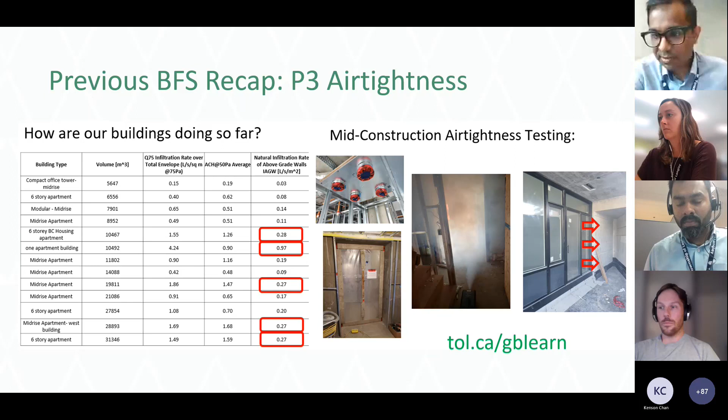As a reminder, at the bottom right of the screen, tol.ca/gblearn, that's Green Buildings Learn, is where you can find all of our previous lectures, including the one on airtightness.

Other notes, there's some challenges to the air barrier system. There's no single air barrier trade. Trades need good drawings on details to follow and good site instruction. Portions of the air barrier are installed by different trades. Tradespeople can unwittingly, unknowingly damage the air barrier. It's easy to miss problems during visual checks. However, there's still airtightness targets you want to meet.

And this all sums up into a repeated topic: the integrated design process. You want to apply it to air barrier systems, as Einar notes. It takes a high-performance design process to deliver an affordable, comfortable, healthy, sustainable, efficient, high-performance building. So the idea is get everybody in the room as early as possible and share knowledge to improve outcomes.

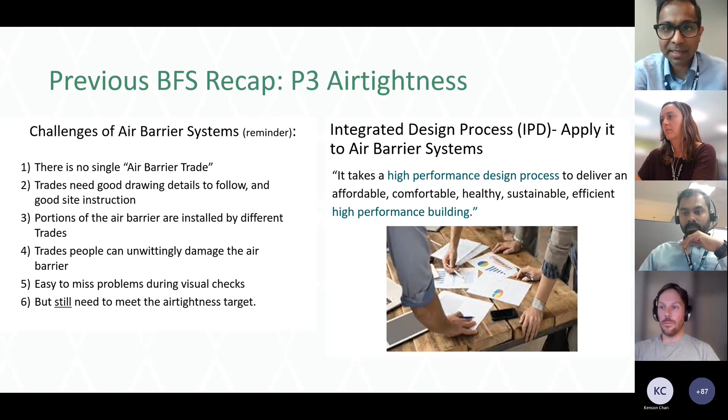Okay, so that was a quick summary of what some of the things we learned in the last workshop. I'd like to move on to our step code adoption updates. So a couple things here.

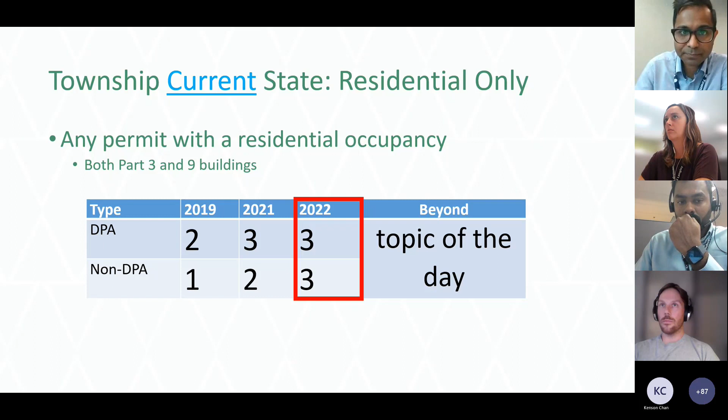So some stats on our residential application of step code. We track a lot of data. We really want to know how step code is being successful in the community. What we found was, out of all of our building permits that have reached final, so we've had roughly 497 or almost 500 building permits that reached final.

160 of those permits, or otherwise 32% of those building permits, exceeded step code requirements or met a higher step. So it's not just a little bit of buffer, this is into the next step of whatever they were required to do. So that lets us know that industry, that's great if people who are trying or experimenting with new ideas are benefiting.

Most of the comments that we track for Part 3 buildings were usually around documentation and design methodology. So documentation, just to be clear, is really if we ask you for a certain number of documents, which is all on our website, and you're missing one, it's flagged. We cannot process it if you're missing your compliance form or your energy modeling report or what have you. If it's missing, we simply stop the process and let you know.

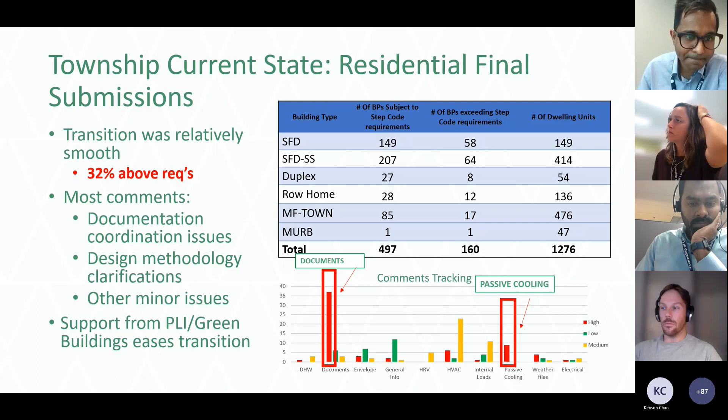So that's where we find document issues. However, it's relatively light, we'll let you know. But however, that does slow down the process if your documentation is incorrect. And the rest of it's around design methodology clarifications, and that's fine. We're here to answer questions, please do, and other minor issues.

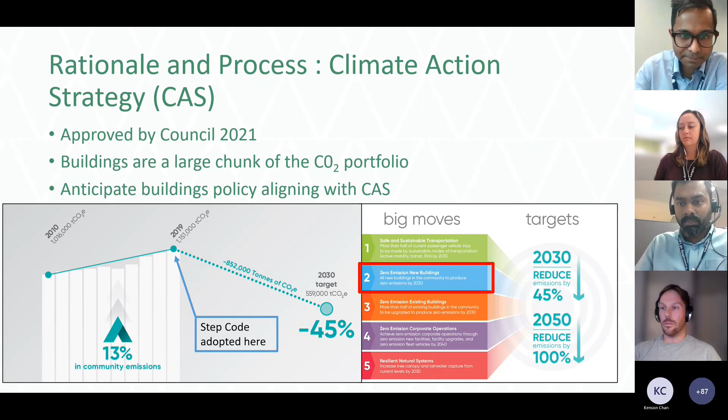We conducted a very rigorous and detailed study on implementation of Part 3 Energy Step Code for the Township of Langley. We did publish this report, and you're welcome to see it on our website. It really focused on staffing resources and let us know that for successful implementation, you want to have the capacity in-house, which we do, as part of the Green Buildings team's role.

We did a technical analysis as well of how Part 3 Energy Step Code adoption meets our goals. Long story short, Step Code does provide significant GHG reductions, energy reductions, and supports the climate action strategy. Our simulations show about 69% reduction in GHGs by 2050. However, that is not the end goal, so we anticipate other policies to help us reduce our GHGs to meet those end goals.

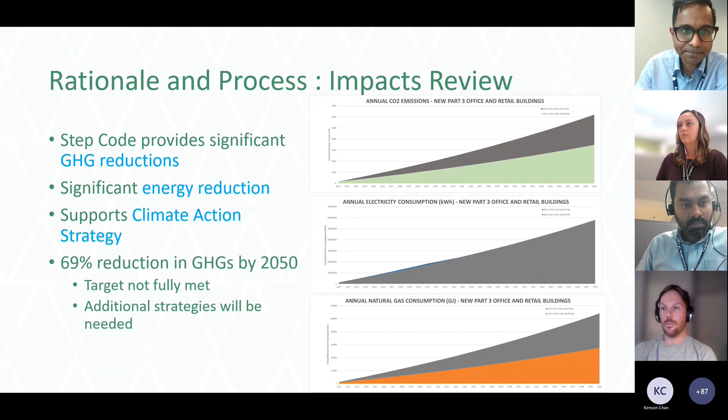Our consultation on Part 3 noted nothing's really unexpected. Step 2 is not an unexpected starting point. There needed to be an acknowledgement of how energy intersects with the aesthetics of a building, and that's acknowledged. Lead time was important, and a notice of when Step 3 would be required was important. There was a call for continued education for the development community, and that's why we're here, along with acknowledgement that these industries can benefit from direct resources from green buildings through answering questions and support.

Okay, so to Part 9, for residential non-apartment BCBC updates. The BCBC in the province has been working on the updated 2022 BCBC. A part of the updates of the 2022 BCBC is a proposed Step 3 baseline minimum.

So that's really important to acknowledge here. Step 1 and 2 are removed, or being proposed to be removed, from the upcoming code update.

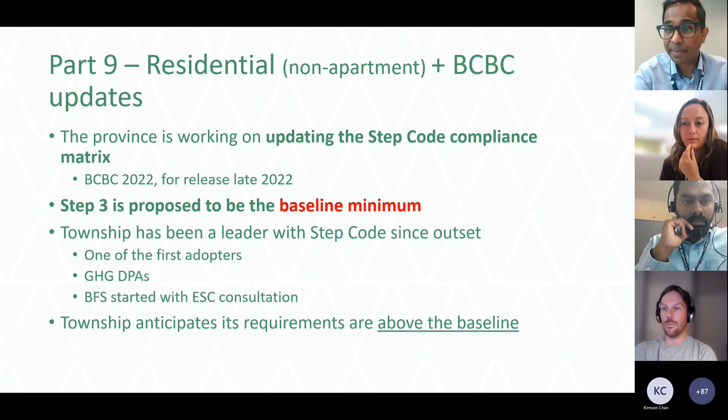The township, since the adoption of step code, has been a leader in its implementation. We were one of the first adopters. We have GHG DPAs where we elevated step code requirements, and the Builder Forum series started some few years ago with Robert Baker to support step code consultation. All of this really was about being a leader in energy efficiency and energy policy. So thereby, if step 3 will be the baseline minimum in the new code update, the township anticipates our requirements are above the baseline and we maintain our status of being a leader in the energy realm.

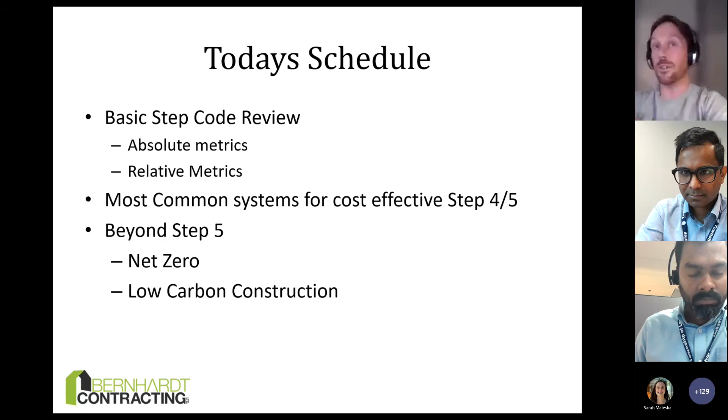There we go. Today I just want to give a quick schedule and a quick overview of what we're going to talk about. We're going to go over basic step code review. I know most of you sound like you're already at step 3, so a lot of this should be a little bit of review for you. I want to focus this particular presentation on the struggles that builders have in the higher steps of step code, which is going to talk about most common systems for cost-effective step 4 or 5, and we're going to talk about beyond step 5. We're going to talk about net zero certification and low carbon construction.

Quick introduction to myself, my name's Dallas. I'm a Red Seal carpenter. If you don't know who we are, we were a passive house builder, kind of pioneered it here in North America. I was project manager for Bernhardt Contracting on a number of projects. I'm also a certified energy advisor with, as you can see, basically every certification that comes under that umbrella. Just want to put this out here as I'm giving the presentation, I'm not on a script. I would love to hear questions, comments, feedback.

I like to create engagement because quite often in these types of talks, if we can create engagement, really good ideas come out of this. Builders are really smart people who sometimes struggle with some of these things, but most of the good ideas I've been able to mine have come out of sessions like this, from people who've had problems, and then we can consult and talk together on ideas.

That's a great question. We'll get into what net zero certification is later in the presentation, Wally, but you'll start to see it coming down. As Kevin said, the federal code that's coming down is trying to align with net zero by, I can't remember, is it 2030, 2035? They shift the date around a little bit. But yeah, we'll get to that.

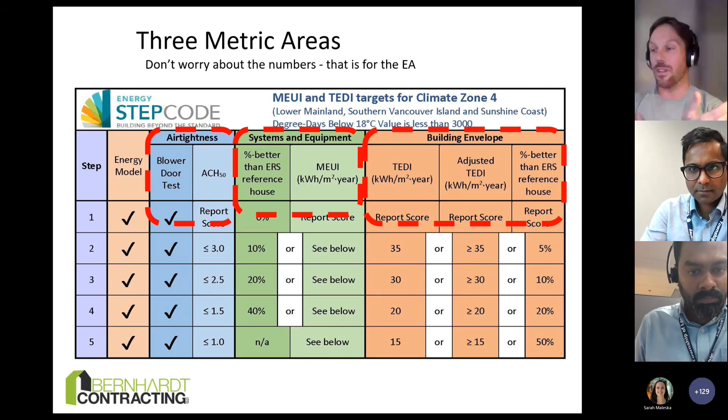As everybody knows, there's 3 areas for step code. It's a bit of a dance between these three metrics: airtightness, building envelope, and mechanical. Within those, we've got some percent-better metrics we'll utilize, which we'll touch on later. You can ignore the numbers here, don't worry about it, that's for your energy advisor and design team to deal with. As builders, there are other things more pertinent to us.

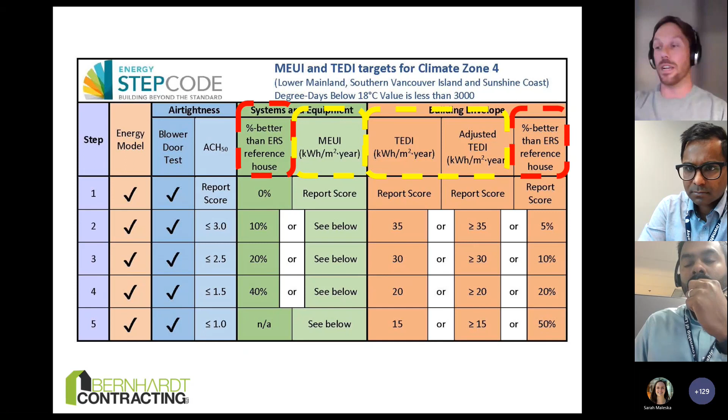But there are 2 either-or categories, and I don't have this in here, but there's a proposal for some either-or with the airtightness targets coming down that I just found out about a couple days ago. I can't say for sure whether they'll be in, but there's potential. From my understanding, really small houses are having problems with airtightness targets, but we'll get into that.

So let's talk about absolute metrics, fun times. TEDI, the thermal energy demand intensity. What we're looking at here, the biggest thing that affects TEDI is the geometry, insulation, and windows of the house, and geometry is the number one factor in this case. This is something we deal with in design, so TEDI is really easy to predict.

It's not something we typically see fails on. As long as once you get your compliance form from your energy advisor, you follow what that compliance form says, you're good to go. Just don't divert from the compliance form. Page 1 of your compliance form is what dictates your minimum code for your house.

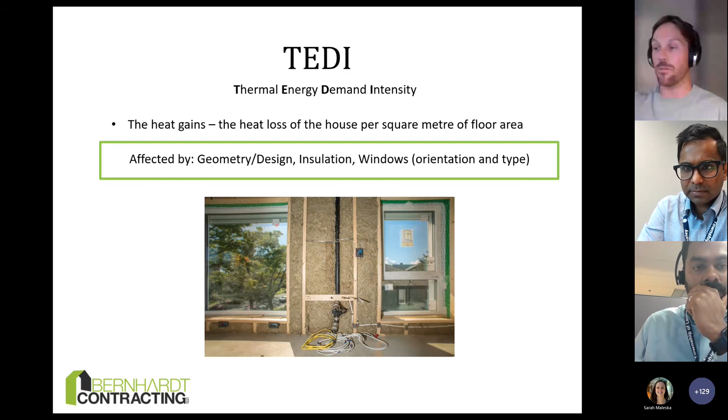So our TEDI targets, what we're seeing is step 3 in most locations, and R22 bats with a 2x6 at 16 inch on center is our most common for step 4 at the moment. We're not really seeing exterior insulation at this phase. Even at some of the step 5 stuff, depending on the build, geometry, and window orientation, we're not seeing a ton of exterior insulation. Our R22 bats are what we're seeing, which is probably what most of you are already building.

So as far as TEDI is concerned, the jump from step 3 to step 4 - I can't remember, was it Andrew? I see your comment here - you're probably doing mostly R22 bats. If you're not, you're doing R20 bats. You're not changing your wall system, you're just changing the bat that's going in the wall. So it's a pretty easy step forward for you as far as TEDI is concerned.

R22 on both of them. So the most common wall system for step 5, we're just spacing our studs to give a little bit less thermal bridging, a little bit higher effective R value on our wall systems. So once again, we're not changing a whole lot.

And in fact, in a lot of ways I'd argue we're saving money because we're saving material, and as everybody knows, material pricing has gone insane over the last little while. So if we can space - now this is going to be contingent on engineering requirements, I realize that, so I'm on board - our 24 inch spacing is what we're seeing for most of our builds in step 5 in our region, which is the same climate zone as Langley.

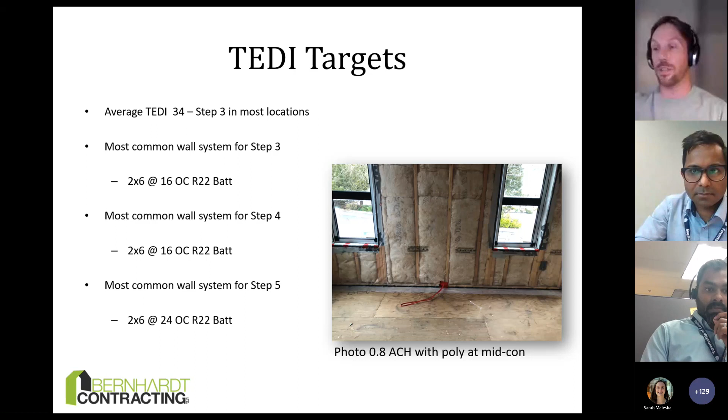This is what we're seeing for step 3 and step 4 as far as our window requirements are concerned.

U1.5, 0.3 solar heat gain coefficients. Pretty straightforward windows - these are Home Depot off-the-shelf windows as far as what we're seeing for window requirements. Not super high. That photo there you're seeing is a pretty gnarly window, that's actually in Mark's personal house. But we're not seeing insane window requirements. We're seeing basically a transition from doing what you're doing now to doing the same for step 4.

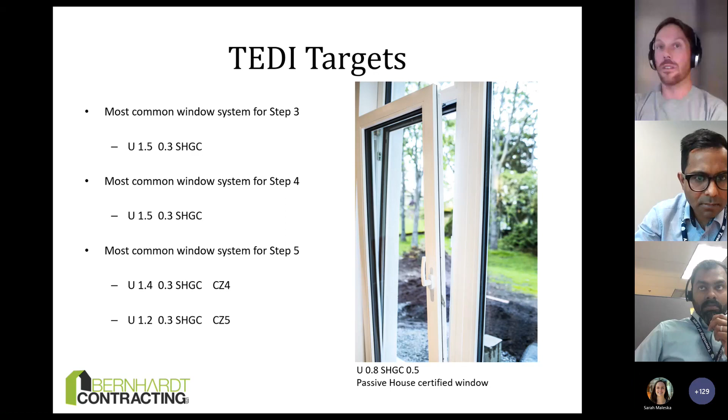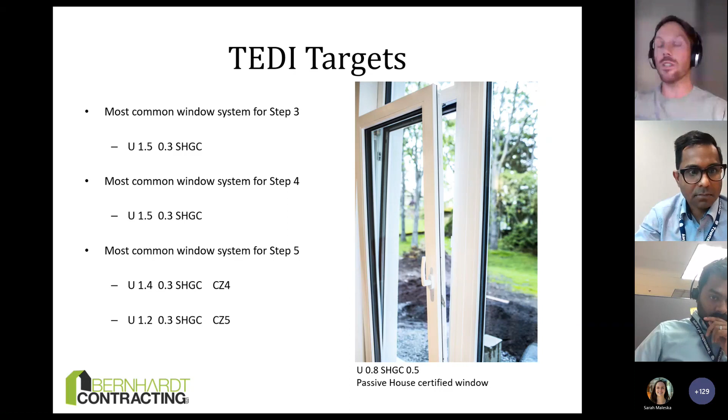This is what we're seeing for step 5 requirements - a slight increase in window performance, not a whole lot. As we're going into colder climate zones, the windows start to become more of a factor. So 1.4, you can find a double pane window in 1.4, but as we're shifting into climate zone 5, U1.2 is probably a triple pane window there. So you could be flirting with the line at step 5, but that's what we're seeing.

We get a ton of questions from builders on window details as far as step 4 and step 5. They're like, do I have to change my window detail? What do we got to do for step 4 and step 5? I think it boils down to this: is your window leaking water? If it is, just do a better job. If it isn't, then you're probably good all the way to step 5. That's it - you don't have to change your window details, what you're doing. As long as you're sealing your windows, air sealing your windows, you're good to go.

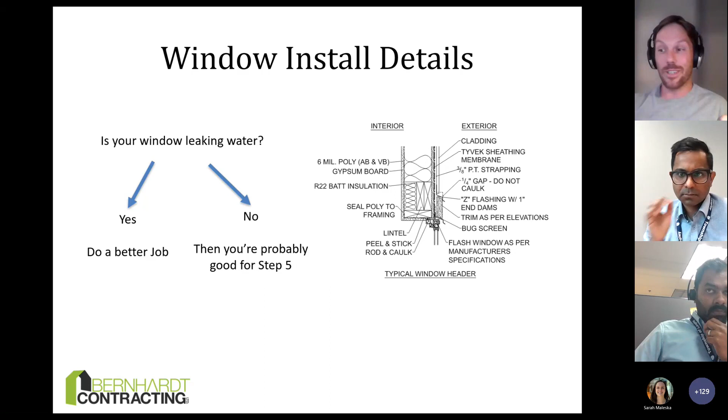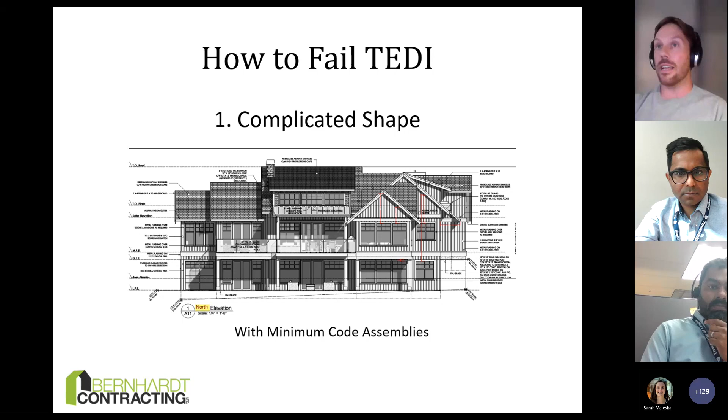So this is something you'll hear if you've ever seen Mark or I give a presentation. This is the biggest struggle that we see with the TEDI - complicated building shapes with minimum code assemblies. It's not to say that you can't build this, you absolutely can. It's just this is where we're going to see cost increases in the higher ends of step code, if you have complicated building geometry or bad window position. So if we have lots of north-facing glazing, we don't have free solar energy to capture from the sun. We have just thermal loss, and everybody knows that the windows are the weak point in the thermal envelope of the building.

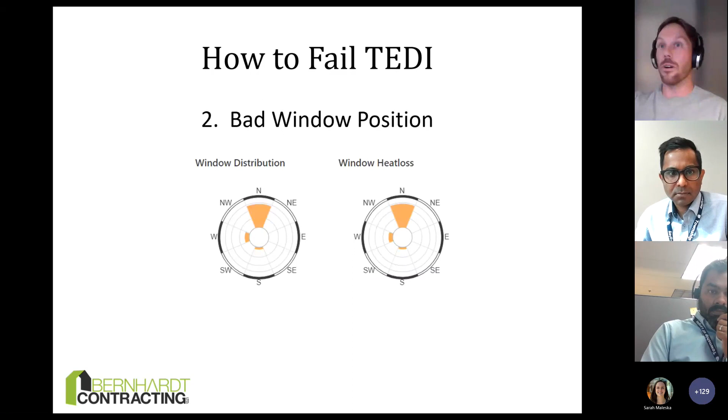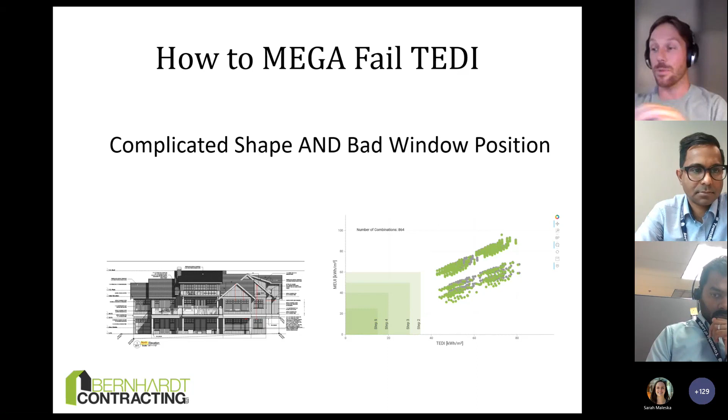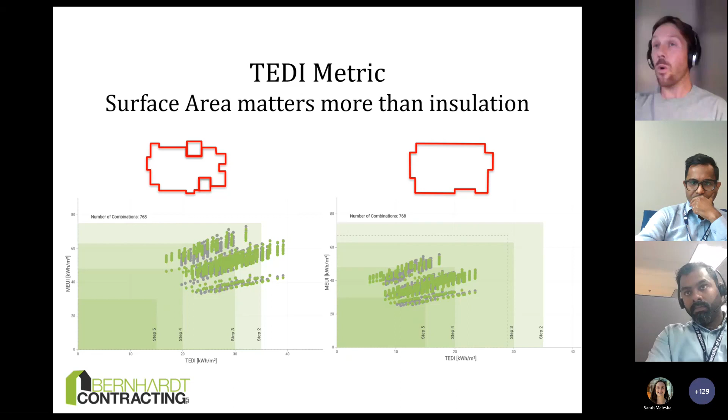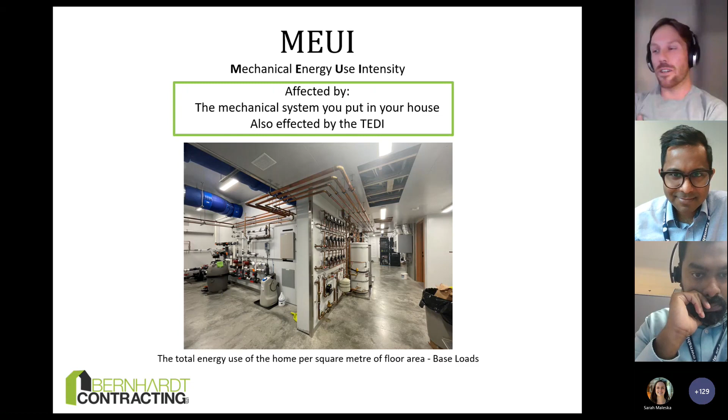Furnaces are about 95% efficient, which is probably what most people are installing now. So for 1 kilowatt of electricity or energy we put in, we're getting 0.95 kilowatts of heat out. Electric baseboard heat, we're putting 1 kilowatt in, 1 kilowatt out. A heat pump, we're putting 1 kilowatt in, 2 to 3 kilowatts out.

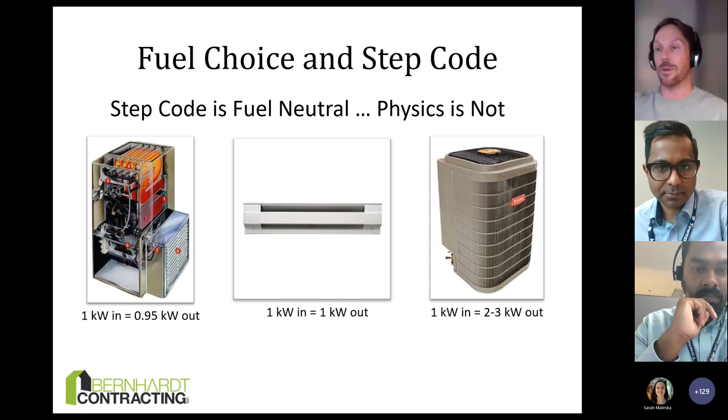We'll talk about pricing because I know it always comes up in these situations. We'll get to that as time moves forward here.

Step 5 heating systems, heat pumps. That's what we're seeing everywhere at step 5. Cheapest running cost, and we don't need a backup - we don't need gas backup. You can if you want, but I'd argue you're spending more money for something that's kind of redundant. You're installing redundant heating systems.

You have access to cooling, which gives us some climate mitigation. I don't know what the temperature was in Langley, but it was 34 degrees here in the city of Victoria the last couple of days - quite warm. This is something we're going to start seeing more and more as we move forward, with climate resiliency and comfort of homes meaning we're going to want to start putting in cooling.

An air conditioning unit is a heat pump. So I'd argue that if you're putting an AC unit in, you just put a heat pump in for the little bit of extra money, since you're already installing a heat pump anyway. We're seeing companies coming out with them, and you can use them in radiant systems. Sanden makes a heat pump hot water system you can use in a radiant floor heating system as a combi system, or you can use it in forced air.

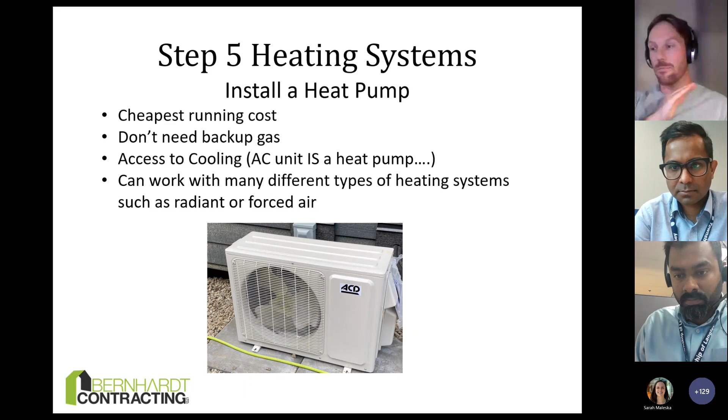Or if you're doing it now, you're probably doing a forced air central system or mini splits. I'm not going to touch too much on the specifics of heat pumps, but heat pumps are the way we're moving - we're electrifying heating systems at the higher ends of step code.

Once we start getting into heat pumps, especially reasonable heat pumps, we're quite a bit cheaper on operational cost than gas. For electricity, we had to use a blended rate because everybody lives in different tiers of electricity, so we decided to use a blended rate.

Good point, Darcy - we don't know what electricity will cost in 25 years. So what we did here is take Fortis's numbers, the gas utility's numbers on this. We didn't use BC Hydro's numbers, we used the gas utility's numbers. We also don't know what gas is going to cost, and from my understanding, as carbon tax increases, gas is looking to double in cost in the next little while.

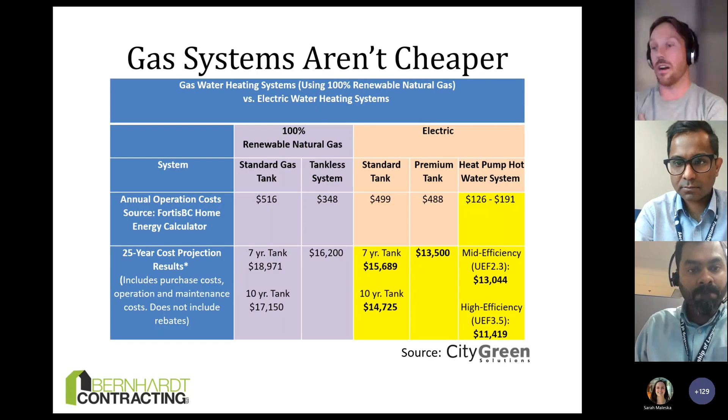I don't know - how can we extrapolate? I'm not entirely sure. So what we decided to use is the gas utility's cost on this - we decided to use their numbers.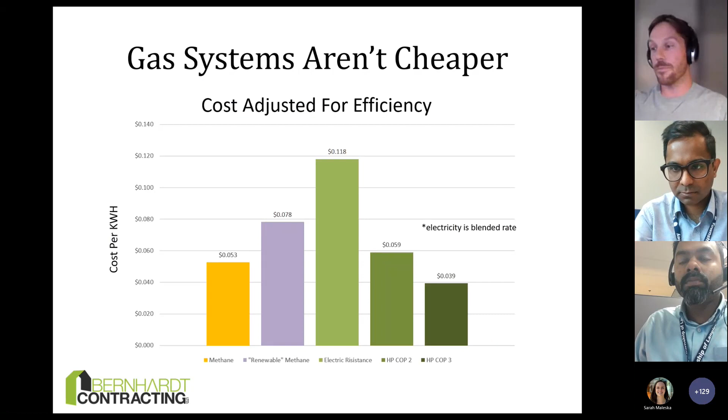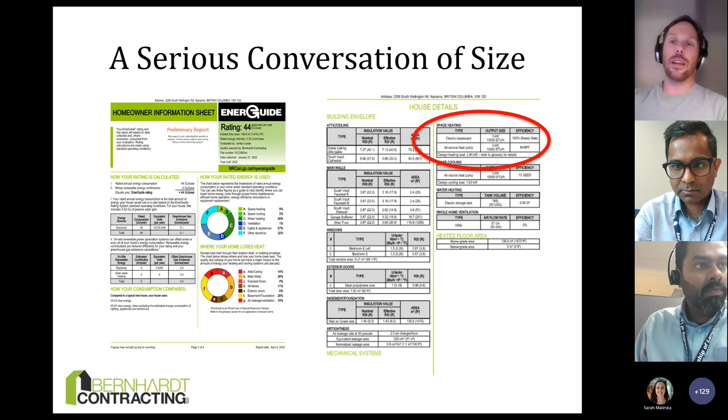So, sizing heating systems - this is something we're starting to see become a really big problem. What we're looking to do here is properly size heating systems using a room-by-room heat loss calculation.

If you're applying for net zero, heating systems are required to be what's called F280 heat loss sized. And if you're applying for rebates from BC Hydro, quite often they also require them to be sized properly. What we're seeing with mechanical contractors who don't do these types of calculations is that they're oversizing heating systems. The reason for that, I don't know for sure, but it's likely that the mechanical contractor will get a call back if there's not enough heat in the house.

They'll never get a call back if there's too much heat. But that has energy implications.

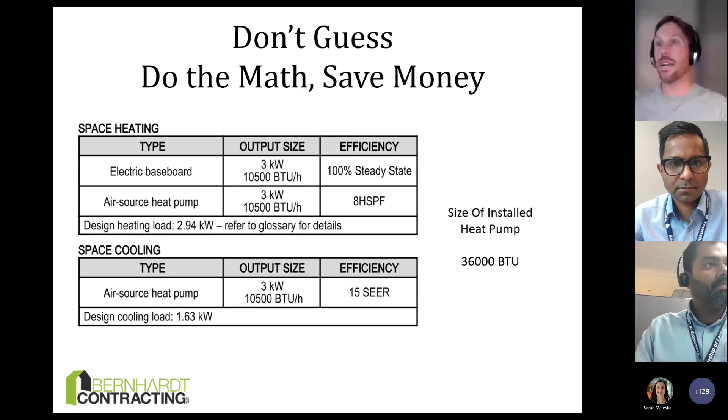So when we do these heat loss calculations, this is a real world example of a house. The size of this system is about 11,000 BTUs per hour. The size of the system the mechanical contractor put in was 36,000 BTUs, and incidentally, they decided to put 2 of them in. So they oversized this system by 5.6 times. This is another cost savings.

For us, it's about a few hundred dollars to do this calculation. If your mechanical contractor can do this, great, let them do it. But you're definitely going to want to size these heating systems through a room-by-room heat loss calculation.

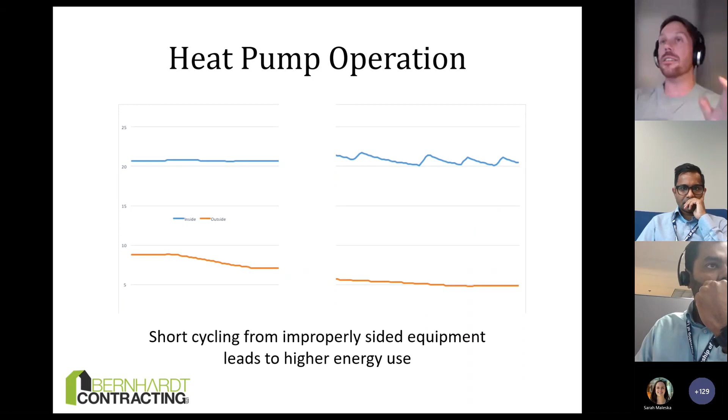Because the heat pump is designed to run like this graph on the left, designed to run constantly for a long time. When we're seeing short cycling like this, we're using more energy. The spikes are what is going to use more energy. So when people say that heat pumps cost more to operate than gas systems, quite often they're sized improperly, and we're seeing these spikes in energy. If we don't size the heating systems, they're certainly going to be more expensive to use because they use significantly more energy.

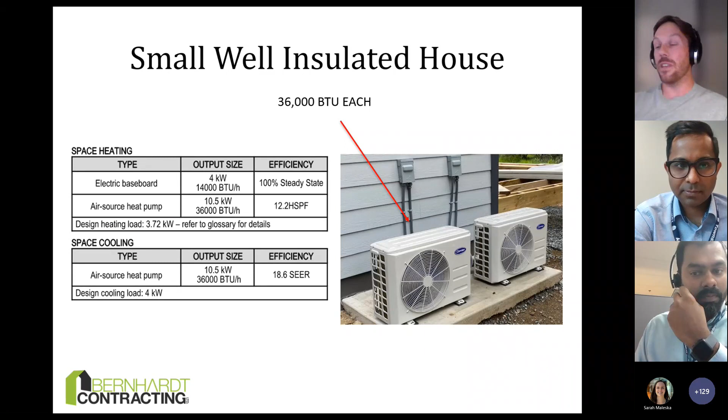So size your heating systems, that's the take on this. Spend a few hundred dollars, size them, and quite often you'll be saving yourself money because the cost differential between a 40,000 BTU system or a 15,000 BTU system is significant.

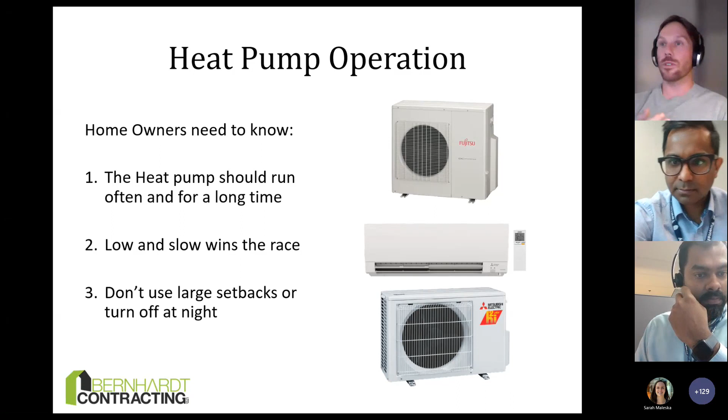Heat pump operation should run for a long time and often. Low and slow, that's what you need it to do. Don't use large setbacks or turn them off at night. Let them run, that's what they're designed to do.

Hot water systems at step 5. Electric tanks are the number 1 system we see, just your conventional electric tank. Cheap running cost, cheap install cost, low maintenance, and it's got a longer lifespan than boilers do. It's really that simple, this is the number 1 hot water system that we see.

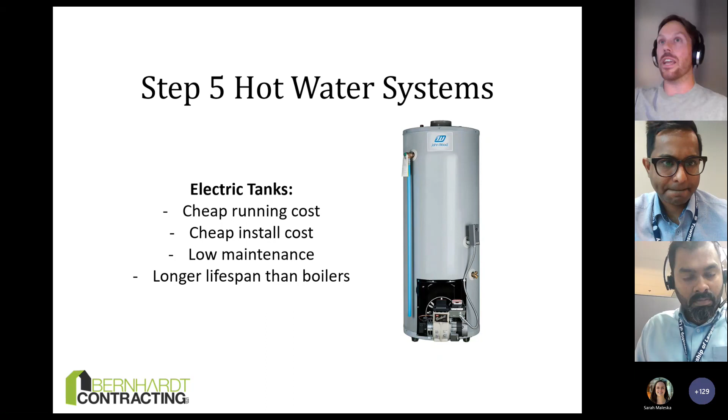On occasion we see heat pump domestic hot water systems, particularly when we fit them in with combi systems. But the location of where you put them is important. It will cool the room if you're not using an outdoor condenser on them, so think about where you put them. They are quite expensive to install right now, and the cost will come down over time I would assume, but they can be integrated into a combi system. Or if you have a client that wants in-floor heating, this is a way that you can do it at high ends of step code.

Kevin, got your hand raised.

Thanks, Dallas. I'm curious, do you know about recovery rates for these heat pump domestic hot water heaters? Are they similar to a gas or electric, or can you not take consecutive baths? Are you talking like an efficiency rate? No, like a recovery - if I use X% of the tank after some dishwashing and bathing, one of the kind of feedback or questions I've been hearing from industry is there's a fear of recovery. So how quickly can it heat back up that volume of water to continue doing whatever domestic needs?

I would argue that as we reduce the energy requirements on the home, that recovery rate becomes kind of moot, because if we're putting them in conventional homes that have no energy requirements on them, that are losing heat significantly, that's where we're starting to see that. So in conventional home retrofit situations, once again we have to size them. If we size them with an F280 heat loss calculation, they will be sized properly. So that would be my take on it.

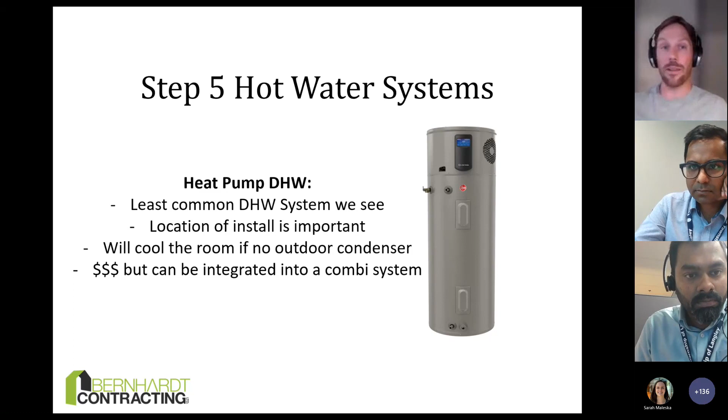So great, awesome questions, thank you. HRVs. Yeah.

Just to comment on Jason's question, I think that's a really important question we're all curious about. Another way to look at it is fuel ratings in cars. The test and methodology they have is standardized across the board, probably nationally and internationally, to get a sense of what's efficient and what's not, like a sports car versus a really compact fuel efficient car. But how you drive it, your mileage may vary, so to speak.

So the concept is, while two different homes with a similar rating may perform differently, it's not a measure against the methodology of design. It doesn't really speak to step code or the design methodology, it speaks to the occupant's behavior. That's really important, and I think benchmarking is going to be a priority provincially as we move forward. We're all very curious about it, but that's another way to look at it.

Oh, and yeah, there you go. So setting benchmarks are more important. Yeah, I mean, keep in mind this is probably going to evolve over time too, right? BC is setting the standard. Langley, going from step 3 to step 4, is trying to be ahead of it all, right? Which I think is great.

So it probably will evolve over time, and you'll see the BC building code is mandated to the step 3 target. The date for that, as far as the province has set, is December 2022. That's the date. It might change, it absolutely might change, but that's the date they've announced. So mark it in your calendars.

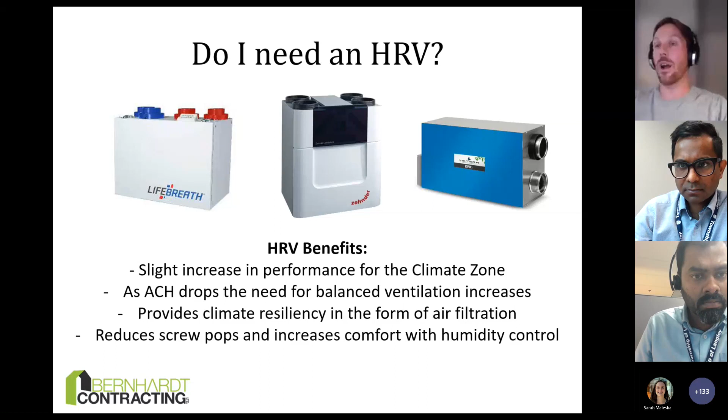Now you might have air exchange problems with this. An ERV - most ERVs have a setting where you can say there's a fireplace in the house and they'll deal with that. And the letters that we write to the municipalities can often negate that requirement. So just be aware, if you're like 'I'm not going down the HRV pathway, I'm not putting it in, I don't want to do it' - there are other implications that could happen down the road that could affect airtightness, which has potential to affect compliance. So just be aware that's a problem you might deal with. We don't see it all the time, but it is something we see from time to time.

So this is something that's coming down the pipe. It's kind of in the works right now, but there are some targets that have been set.

Kevin, it sounds like you guys have some sort of greenhouse gas targets for your builds already. So it sounds like Langley's already ahead of the curve, but greenhouse gas intensity targets, there's some proposed provincial metrics for this.

Just to confirm, let me jump in here. We don't have direct targets for a metric. We have elevated expectations around design that reduces your GHG consumption.

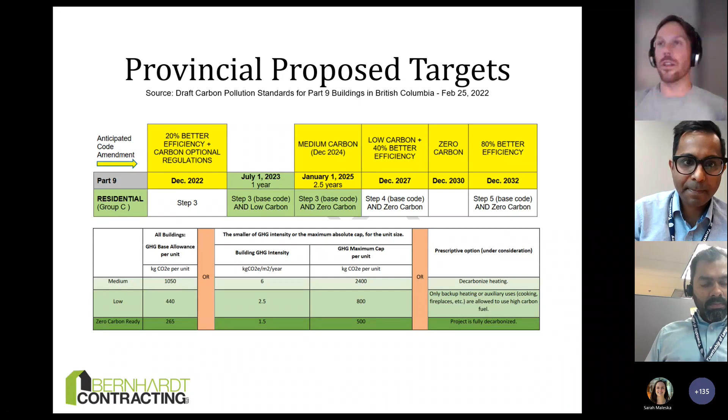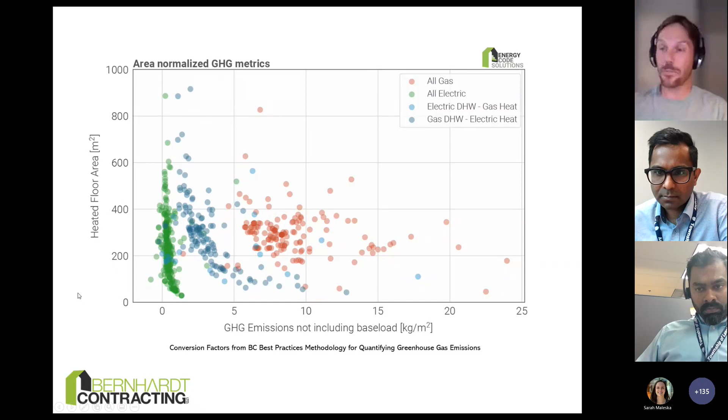Don't worry about what these numbers actually are. This is really what matters. So what we're looking at here is a database of about 1,500 files that we produced, and we sorted them by their mechanical systems. Green is all electric, red is all gas, the two blues are a mix between the two. This is the target that's proposed for July 1st, 2023.

And this is where these mechanical systems are falling. So it sounds like you guys are going to be step 4 already. So maybe this won't be a problem for you, but it is going to be something that you're going to have to consider, and this is going to run alongside the step code. So it's going to be step code plus GHGI targets.

Jason asked, has it been so smooth for homeowners to adopt HRVs or ERVs compared to if they were previously living in an old house? Do they ever shut it off due to noise? Are they changing filters enough?

Okay, so let's deal with that from the top. When we're talking about comfort and climate resiliency, that's where we start to see homeowners really seeing the value of ERVs and HRVs. Those are the two things they really start to care about because they can quantify that in their lives, right?

The energy implications are something that are a little bit harder for them to see or feel or touch, but they remember what it's like to breathe in smoky air and they know what it's like to not. So that's kind of the way we've been pushing it. So the answer is yes.

Do they ever shut them off due to noise? Definitely. But the biggest callback that we get from them is when we're doing more high performance HRVs, they think they're not on, they're not noisy. They call us back and say, this machine's not running, you need to come check it out. And we show up and sure enough, it's running.

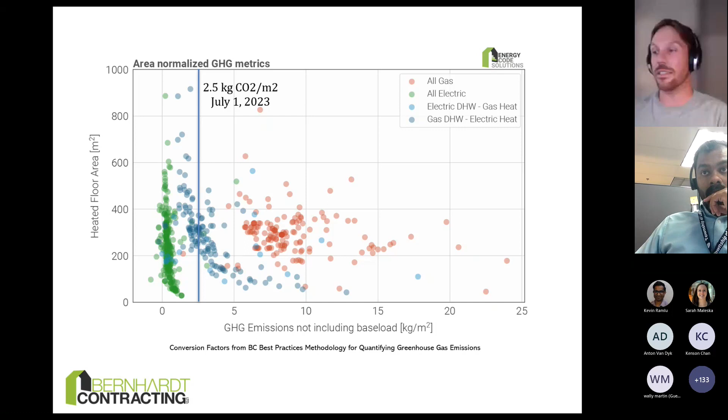The way we sequence it is framing goes in, HRV comes in alongside plumbing rough-in usually, electrical comes after that, because otherwise your electricians are going to chew up all of the space for your mechanical systems, and they can wrap their wires wherever they need to. The mechanical system and the HRV have a set route and a set size and area that they need to take up. So that's how we sequence the install of those things.

Hopefully that answers your question, Jason. But this is coming down. July 1st, 2023 is the proposed metric. It's a year away right now, and this is what we're looking at. So we're going to be probably looking at all gas systems, which maybe you're seeing them at step 3. We're still actually seeing quite a bit of all gas systems in, but this is coming down the pipe.

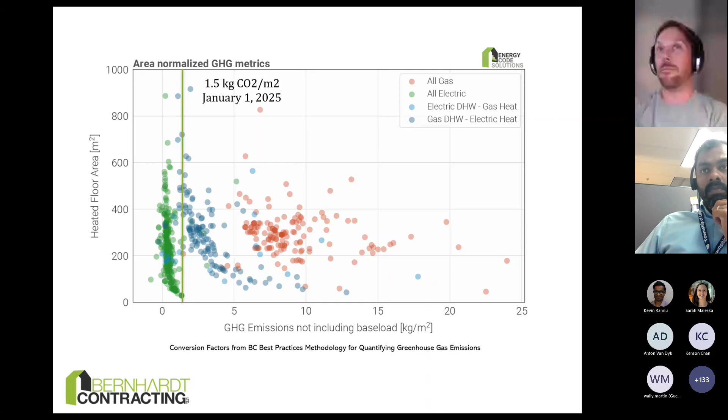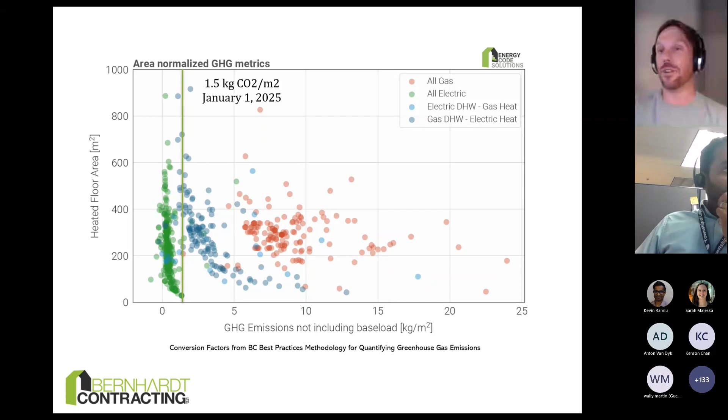This is the other target that we're seeing, January 1st, 2025. We're looking at pretty much all electric. There might be a few that might squeak through, but the GHGI targets are coming. Our conversion factors for this were taken from the province, how they're going to implement this, but GHGI metrics are going to run alongside building code, and they're coming sooner than you think.

So this is the area that I really wanted to focus on here, because ACH, as you probably all know, is the target that we can't predict as easily as all the others, because it has to do with the quality of the install we're doing. And as Einar said, there is no one building or one air barrier trade.

They kind of all are air barrier trades, actually. As your electrician punches through your air barrier, they're an air barrier trade. The installer, who might be your framing crew, your in-house crew, or your insulator, they're also the air barrier trade. The plumber who's going through your air barrier, they're also the air barrier trade. So they're all kind of air barrier trades.

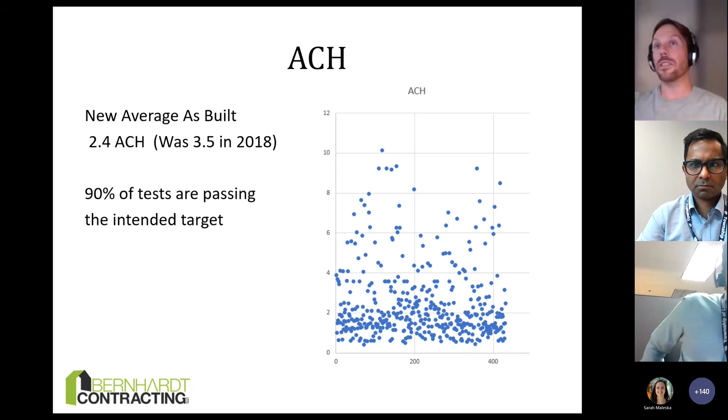Quality control on this is going to be critical to your success. But what we are seeing is that most of our tests are passing the intended target. 90% of them are. And the reason why we're seeing that is we're doing mid-construction testing. We're coming out when the air barrier is exposed, whatever you're using for an air barrier, whether it's an exterior Tyvek, a high-performance SIGA or Intello membrane, or a conventional poly membrane.

It's still exposed. We test it while it's exposed so we can fix it if we have problems. And as we start to do that, you start to see the areas that are regular problems, right? Inside corners, transitions, plugs, pot lights. Pot lights are the leakiest ones that we see all the time.

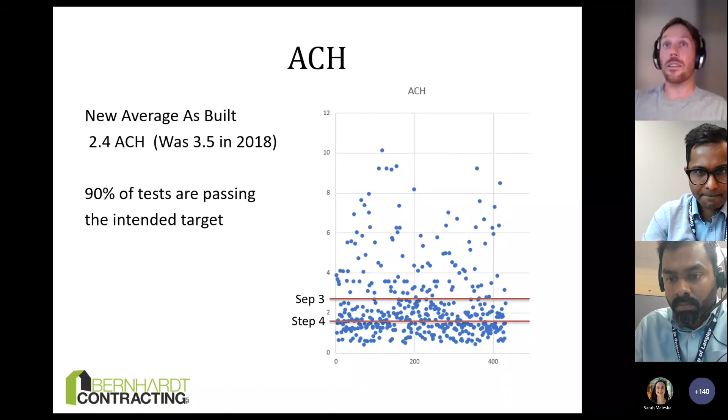There's tons of areas where we're coming in and out of the air barrier where we see air leakage. The most common one that we're starting to see now is exterior sealed membranes. So Tyvek can be an air barrier if you seal it. You can have multiple air barriers in your wall, but you can only have one vapor barrier. The vapor barrier in our climate zone, as far as BC is concerned right now, is on the warm side of the dew point, which is why we put it right next to our drywall.

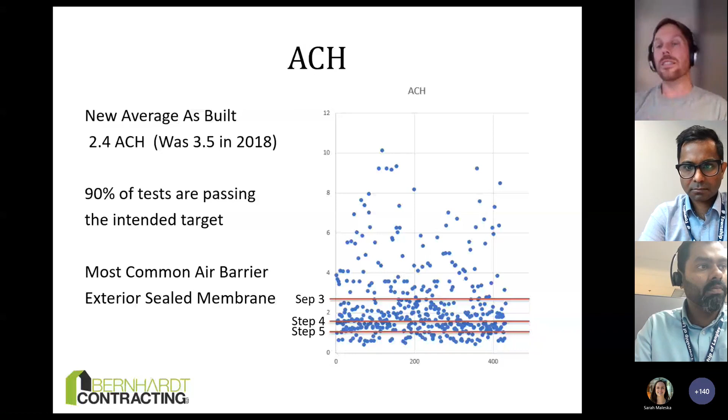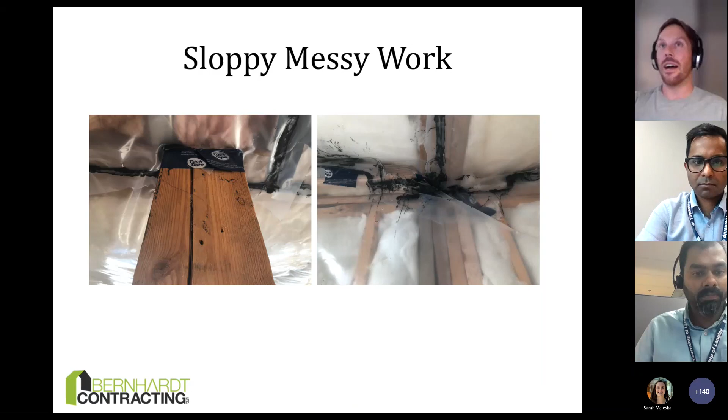The reason why air barriers fail is lack of supervision and sloppy work. It's pretty much every time that's why we see them fail. A big one: just supervise your sub trades. Unfortunately, that's what you have to do.

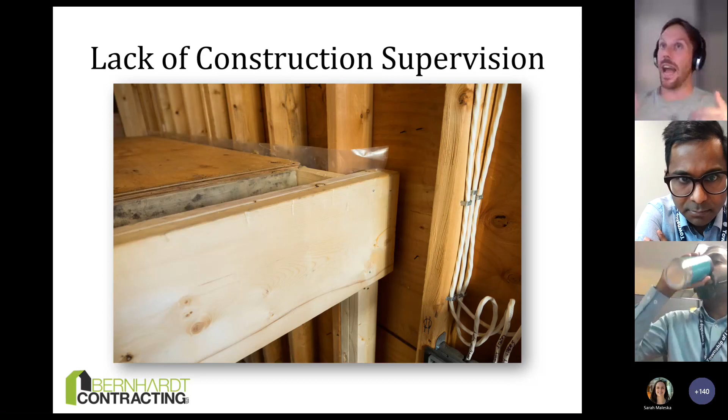Spray foam, always a controversial topic. The majority of fails that we see are on spray foam houses. There's a number of reasons for this.

Spray foam is actually a bad building science assembly. It expands and contracts at a different rate than wood does. It has a mechanical adhesion to wood, not a chemical adhesion. So as your wood moves from humidity and temperature change, the spray foam cracks off, creating little micro gaps in it.

If you have I-joists as your flooring system and you're spraying in your joist ends, as it expands it quite often doesn't get into all of those little corners that you need to, and then it's death by 1,000 knife cuts.

Should EAs be promoting more external air barriers? Why do more builders not use plywood as an air barrier and tape the joints?

Great question, Andrew. There's a million different ways to skin this cat. We've done taped plywood, we've done exterior membranes. Not all EAs, everybody kind of has their own preferred method, I suppose. We're here trying to promote exterior air barriers because I think they're easier to do.

My background is I come from Saskatchewan, from a tract builder that built over 150 houses a year, as a site supervisor. So we did a ton of houses. Then when I moved into the high performance building world, the first house that I did an exterior air barrier on, I couldn't believe how much easier the detailing was.

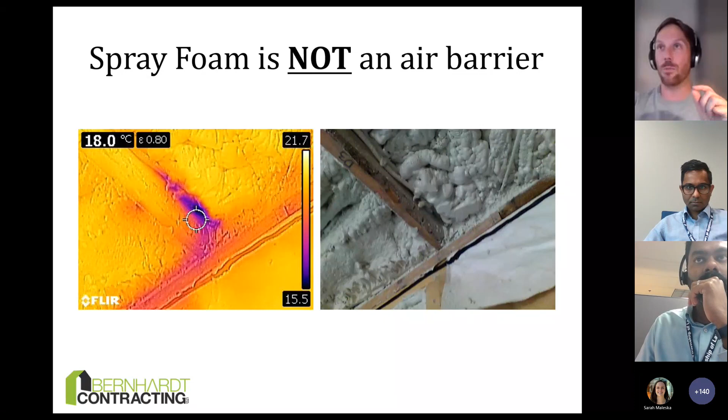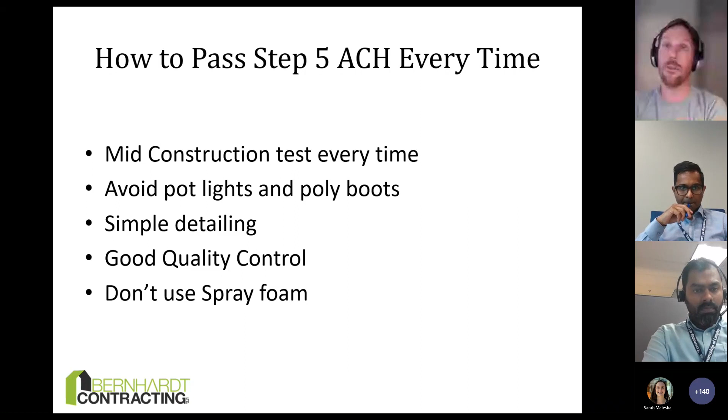How to pass ACH every time? There you go, Andrew. Mid construction tests every time. Avoid pot lights and poly boots, or come up with different detailing for them. Don't use spray foam. Use exterior air barriers.

We could have played with those building assemblies a little bit, but we decided to go in this direction. This house was step 5, about 10 grand cheaper than every single other house on this block. This builder built every house in this development, and after they built this house, this is how they build houses every single time now. This is the direction that they fully moved.

So they're consistently building step 5 houses. This is a step 5 house that we wanted to cost optimize and make as cheap as possible.

The way we did this, the pathway to this, was an integrated design process. I know Einar harps on it, I harp on it. It's the only way we can hit these high performance targets for reasonable pricing. If we all live in our own little silos, we can still do it, it's just going to cost us a little more money and change orders down the road.

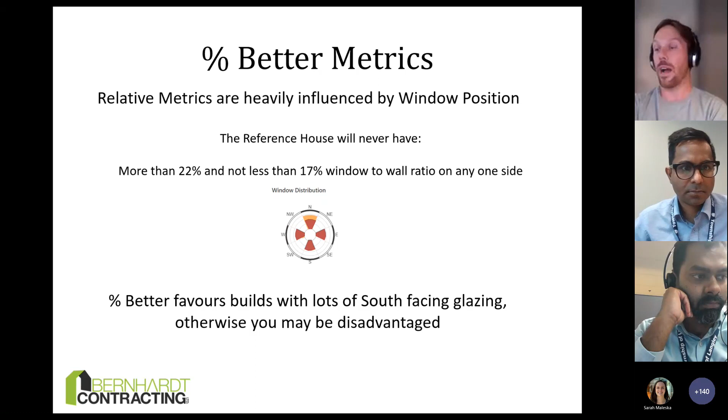So the reference house will move your windows around. If you have a house with your majority of glazing facing north, this is what the reference house is going to do to your houses - it's going to move the windows around. I don't really know why exactly, but now we're comparing this house to a house with south facing glazing in the reference house, so your house is not going to perform very well in this case. You have lots of north facing glazing, the reference house is not your friend.

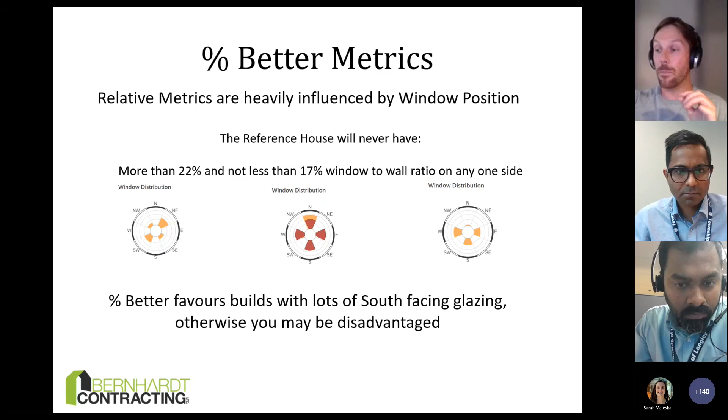If we have this, it's a maybe - don't really know what's going to happen, maybe it'll perform better, maybe it won't. If we've got south facing glazing, the reference house is going to have north facing glazing, and our house will appear to perform significantly better than the reference house.

Cooling load comes into this. Unfortunately right now there was a peak cooling load metric that came in. A friend and I did some analysis on the peak cooling load metric, and I'm going to be careful about how I talk about it - we couldn't reproduce the results that the federal government said they were going to get. In fact, in a lot of ways we saw scenarios where it had very, very high absolute cooling load metrics, and the peak cooling load metric gave it a pass.

So right now that's something that's being worked on. Yeah, we were seeing cooling loads that had the potential to kill people - it was crazy, and the peak cooling load metric was like, yeah, it's good to go. And we're like, I don't know about this.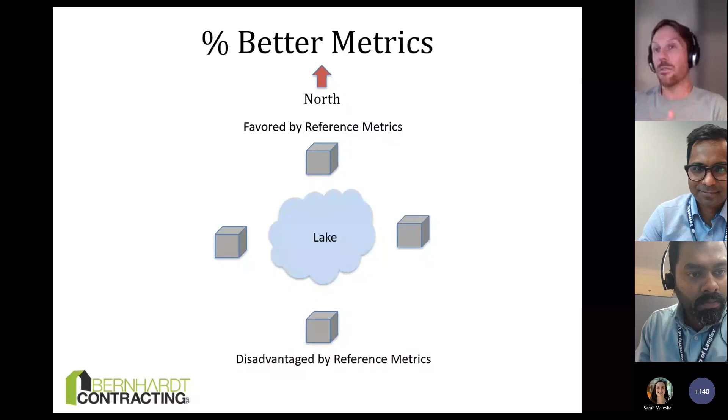So right now, there are no cooling load metrics. The only way a cooling load metric plays into this is if you add cooling to a house, the MEUI will adjust to allow you to burn a little bit more energy, which makes sense, right? Because now you're adding an additional load on the house. So they're like, okay, we're going to give you an allowance for that cooling load. That's the only time the cooling load plays into it.

Yeah, lots of overheating. Yeah, absolutely we are, for sure. So right now it's out of the scope of the modeling, which is really unfortunate. We're trying to work on that.

Yeah, and like Kevin said, passive solar shading is key for sure. Actually, I'm just going to bump back to this slide. On the backside of this house, I believe is southwest. The majority of the glazing on this house is southwest. We've got big sliders on this side, but incidentally, because we knew the design implications, there's overhangs on the backside of this house. So in the wintertime, as that sun drops, we're capturing solar energy from it. But as it rises in the summertime, we're getting full solar shading on those homes so that we don't overheat it. Yeah, absolutely, Kevin. Great point.

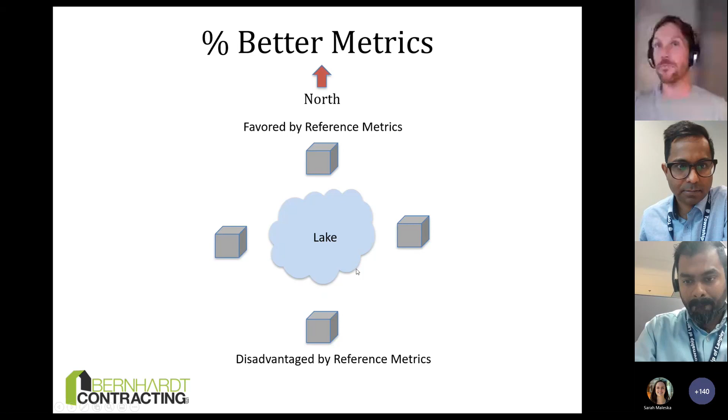So percent better metrics, this is what we're looking at. If you're facing south, articulated house with south facing glazing, the percent better metrics are going to favor you. If your glazing is majority facing north, you're sticking with the absolute metrics. So that's what we're looking at here. When to use them: you have a south facing lot, you have a big budget, because those seem to be the ones that favor the percent better metrics. And in a highly articulated building with number 1 and number 2, that's the time you're going to be using the percent better metrics. So do not set up your design requirements to rely on these metrics. They're very, very difficult to predict, but definitely utilize them when they're there, we use them all the time. In all other cases, you're better off with the absolute.

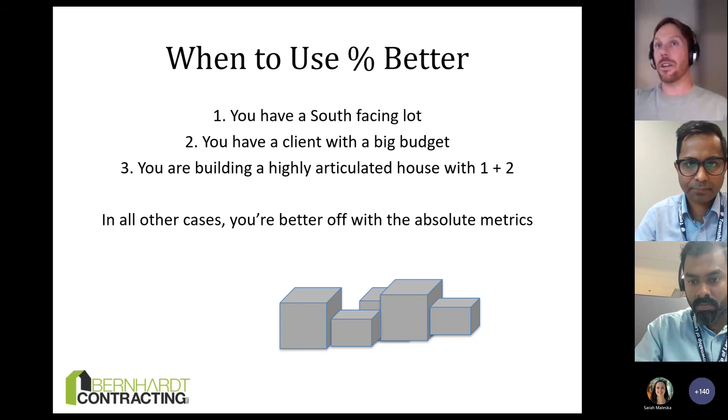So there's a question about net zero. Net zero is going to fall between step 3 and 4 sometimes as far as the building envelope assembly requirements and the actual requirements go. But the goal of net zero and net zero ready is to prep for your on-site renewables. It's to get design loads down. What we want to do is get those loads down as much as we can so that we can use solar, renewables, on-site renewables, in ways that make sense.

So this was a net zero heritage house that we were a part of. This probably looks similar to houses that you guys see in Langley, a little bit of articulation. But what we're looking at doing here is we want to lower those energy loads first. So we're looking at pre-reno and then post-reno. In this house, before we started sizing solar systems, we looked at reducing the energy loads, not just offsetting them. And then once we get the energy loads to a reasonable amount, then we will offset them with on-site renewables.

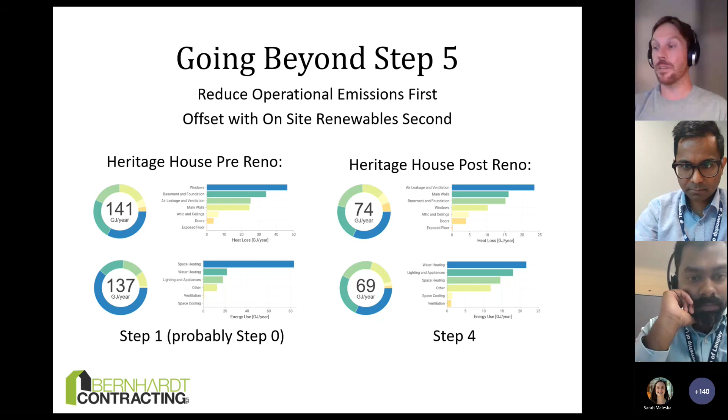So net zero is a certification that you can get through the CHBA. It sounds like some of your builders are already doing it. It's modeled out so that overall the house will consume 0 gigajoules per year. That's what net zero is. Net zero ready is there's enough space on your panel for your solar system, and you have the infrastructure in place to just install solar panels. You don't have to do any deep energy retrofits. It's ready to go, the modeling's already done for it, you just haven't installed the panels yet. So those are the differences between the two: net zero is modeled out to 0 gigajoules, net zero ready is everything's ready to go, you just haven't installed the panels yet.

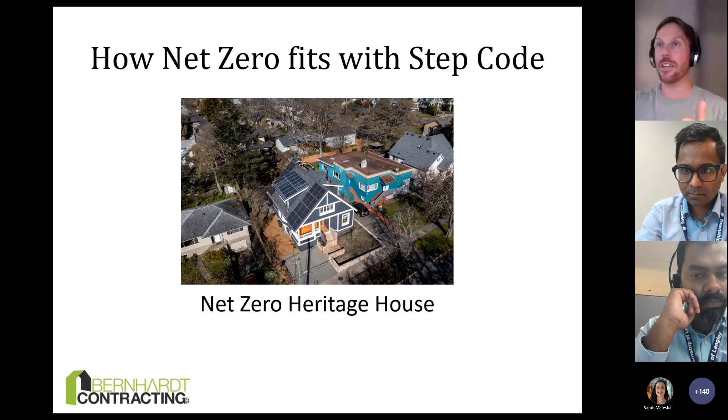So when we're looking at going beyond step 5, this is kind of what we're looking at here. We're looking at electrifying your mechanical systems. Industry, passive design, yeah, great, perfect. We're moving into electrification, that's the direction we're going in. We see it not just with the step code requirements, but also with the GHGI requirements that are coming in.

It seems like if you've got good building geometry, we can still see some gas systems in there. It's not saying that they're exempt from it. They can still get in there.

Stronger roof for solar panels, maybe. I'm not an engineer, so I can't say this for sure, but in the retrofit situations we've been seeing, as long as you keep the solar panels at the same pitch as the roof, engineers are typically okay with it. As soon as you shift it, wind loads change, other loads change, and we have to start looking at stronger roofs. At least in my anecdotal experience, as long as we're installing at the same pitch, it doesn't require that.

We haven't been seeing any additional requirements on roofs for electrical heating, which owners may not be wanting. In new builds, gas systems still require electricity to operate. They're all spark ignition now, no pilot systems anymore. So gas systems still require electrical systems. If we're talking about generator backup, that's a different story, and it's not really within the scope of building code.

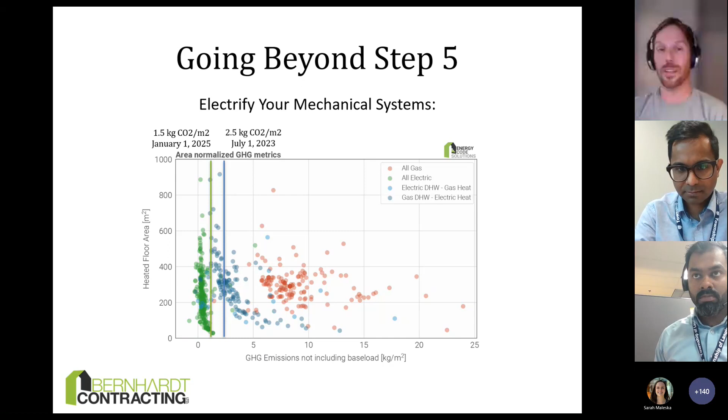But yeah, beyond step 5, what we need to start focusing on is load. Once we start bringing those energy loads down, the embodied carbon in homes starts to become a bigger piece of the pie. When we look at concrete and foams, which are plastics, they're a huge portion of that embodied energy, and that comes down to design. Yeah, keep them coming.

It's great. So stop using spray foam.

The city of Victoria and it sounds like West Vancouver just implemented deconstruction bylaws for homes over 1960. Once that spray foam touches a building material, that material is forever garbage when we tear that house down. The spray foam itself is also trash, all of it goes into the landfill, we can never reuse that stuff ever again. So when we're looking at circular lifetime impacts of products, spray foam is the worst culprit. It's terrible. As we established, it's bad building science in assembly. It's a great insulator, great vapor barrier, but it brings other problems to the table.

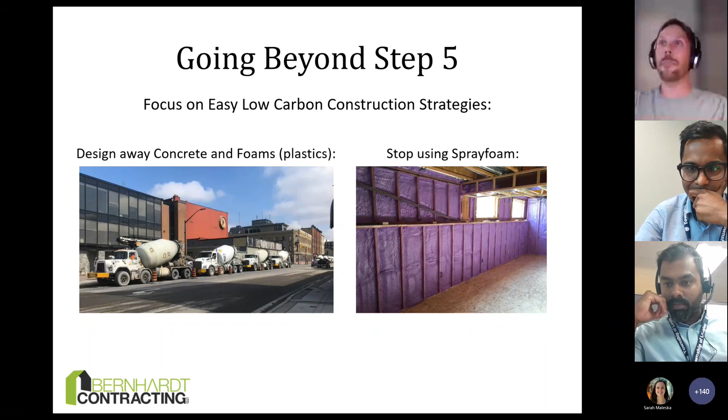Yeah, great, thanks Katrina. Start deconstructing houses if they're older - right now they're saying if they're older than 1960. So we've done both deconstruction and crunch-and-dump. Your costing may vary, but we're very dedicated - we had a team that was very dedicated to this.

What do we do with spray foam in renos? Landfill. Yeah, it all goes to landfill. Anything that goes in there, if you take it out, it's going to the landfill. We can't reuse it. And eventually it's just going to end up as microplastics in water streams likely. So I don't know, I'm trying to advocate to get away from it.

I see it used in filling up little micro holes, like where we've got electrical penetrations going through top plates, things like that. I get it, it gets the job done, right? So where I see it being a real problem though is as a main insulator - that's really the issue here. I just don't want to pretend that it's going to fix all of our problems.

Because as we start to look, embodied carbon is on the horizon. I've got a thing coming up here. The federal government is looking at embodied carbon. It's probably 100 years away, but the conversation is starting to happen around it.

And the last thing we can do is try to find alternatives to what we're already doing. So cellulose insulation has significantly lower embodied carbon - it's thought of as a carbon negative insulator, unlike fiberglass. And it's cheaper than fiberglass, and we can insulate ceilings the same way. So it's an easy transition to just use cellulose instead of fiberglass.

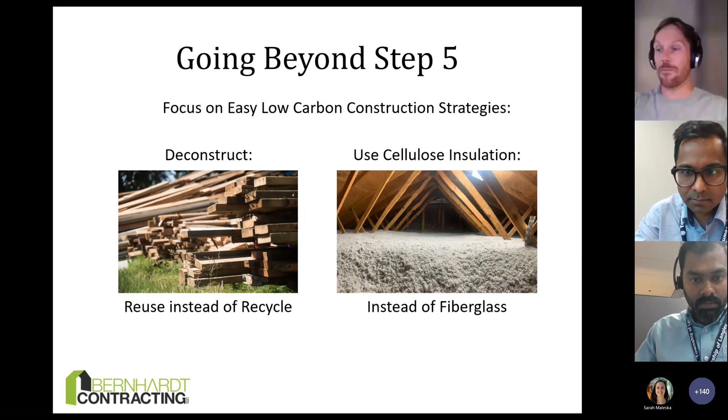But yeah, embodied carbon calculations are on the horizon right now. The federal government's looking at tackling this. If you're looking at implementing it into your building practices, a bunch of builders here are already doing embodied carbon calculations, and architects are starting to do it as well. There's a few carbon calculators. Right now, I'll be totally honest with you, the carbon accounting in buildings is all over the place - there's no real good standard for it yet.

Everybody's trying to work on the problem, but it is coming down because right now, as far as we understand, operational emissions are a huge piece of that pie. In new build construction, it's low-hanging fruit. We can tackle it. The embodied carbon emissions is something that the way we do the accounting is the debate that's happening right now. So I wouldn't say it's around the corner, but it is on the horizon, something being talked about in code circles at a federal and provincial level right now.

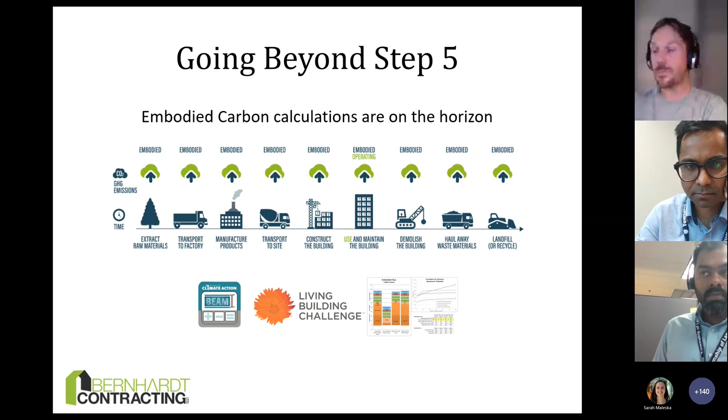My big takeaway from this is TEDI and MEUI are easy to predict. Your air exchange is less easy to predict, and there's diminishing returns as we move forward. So the jump from 2.5 to 1.5 is easier than the jump from 1.5 to 1. If you can be ahead of the curve to give yourself breathing room, if you target 1 and do a really great job and hit 1.1 at step 4, great, now we can start moving forward and we're not worried about compliance. But if we're scrambling to squeak across the line, that's where we start to see problems. So my takeaway is think to the future, try and be better than we are now to give yourself a little breathing room.

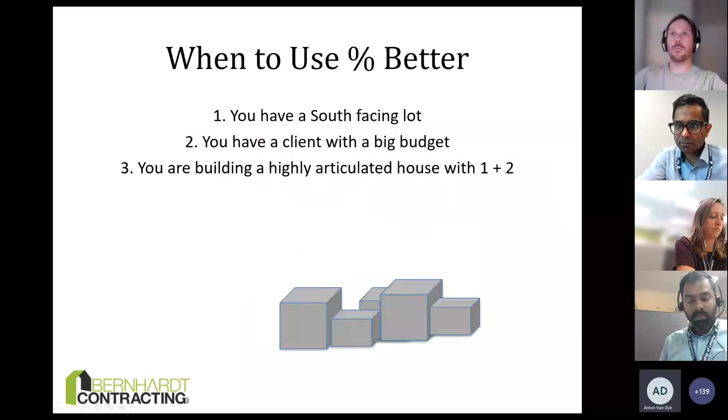But I do like the fact that you brought it up, because when you talk about embodied energy, we're seeing a lot of homes go to triple glazed windows just for the sake of going to triple glazed windows, as opposed to looking at a window's overall performance. When you talk about the natural gas we're burning to produce the triple glazed product, if 1.5 is sufficient, we actually get a win-win by reducing embodied energy and we get high performance. So what's the math that's working there that makes this work?

So in this particular case, what we're looking at is very simple building geometry, which is the key here. And because we're a passive house builder, we know we do glaze tuning as well. So you're right, you're absolutely right. Not all energy advisors are well versed in this. We're just fortunate that we have a ton of experience in it.

So what we did here is we came to the table with fundamental principles of understanding that building geometry is the number one component. Because the energy loads on this house were so small, we could kind of - I want to say this is going to sound a little weird, but I'll say it this way - we could burn energy through a lower value window because our building geometry and our insulation was enough that it was adequate to make up for it.

We look at houses as a system now. So when we're looking at the house as a system, you can do whatever you want. Incidentally, building code won't allow you to do this because I think BC changed to U1.6 windows. But theoretically, you could put a single glazed stained glass window all facing north in your house, assuming the rest of the house was adequate to make up for that window.